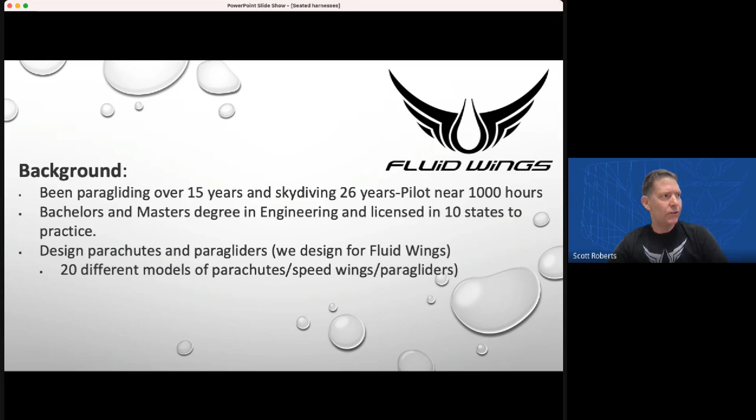All right, my background is I've been paragliding for about 15 years, skydiving for about 26. I'm a pilot with a bunch of hours. Got a bachelor's and master's in engineering. I practice in a bunch of different states. I still practice. We design the parachutes and paragliders, so I do the numerical stuff. I'm the numbers guy, and Kevin is the hands-on guy, where I'm like, hey, look, I got an idea. The numbers say this. What do you think? How do you think we roll it into reality? At this point, we've done over 20 different models between parachutes, speed wings, and paragliders. Some of them never got released, but we've done a lot.

We were jumping with seated harnesses back in 2009, both Kevin and I. We weren't doing it for skydiving, we had another project we were working on. So we developed one and started jumping it to do something else. That's kind of how we got our feet wet in this stuff. And next thing you know, we're building parachutes and paragliders.

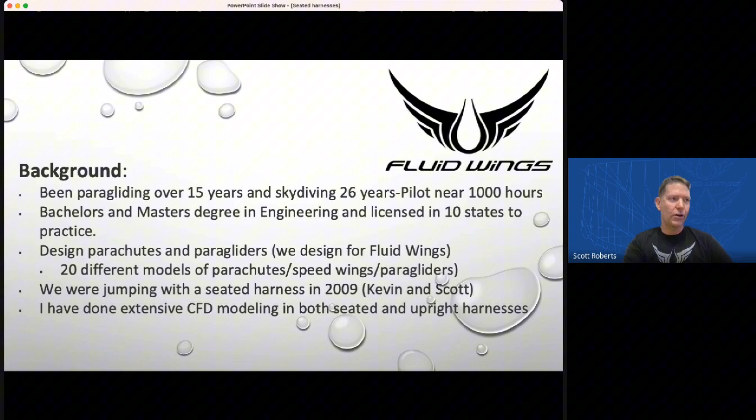I've done a ton of extensive CFD modeling, correlated CFD for seated and upright harnesses. So we do both, and we both fly high performance wings, foot launch, out of airplanes. We're flying this stuff daily. This isn't some guy sitting in an ivory tower. We don't do anything we're not asking you guys to do.

Let's talk about it. Everybody calls them supine harnesses, right? If you look up supine in a medical book, they usually talk about someone laying down. No one's laying down in these harnesses, not yet. There's some guys in paragliding that are getting close, but even then, they're still sitting up. They've got about a 45-degree angle on their back. So I always like to dig into the correctness of each thing, and to me it seems more like a seated or a recumbent harness. Supine seems like maybe not the right way to refer to it. So I always throw that in as the first thing to think about.

We're going to talk a lot about harnesses, and we're not going to get into the nitty-gritty of designing or testing skydiving harnesses. But I can tell you that what we're telling you today isn't just stuff we've designed and built that's been jumped, but we've also designed and built stuff that's for sale. In our paragliding world, we have a line of harnesses. So this is something we're pretty familiar with.

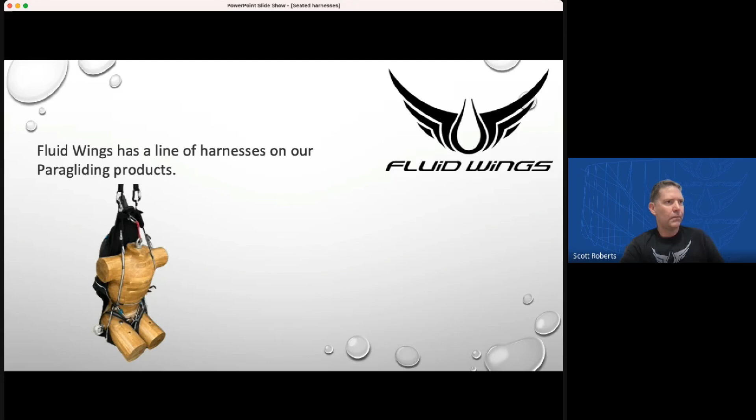You see the picture there, that's some of the testing. That's actually the reserve loop testing on a harness, our current paragliding harness. Some of the EN testing. EN is a European norms standard society for Europe, and they are basically like a TSO for paragliding equipment.

The certification is much like a TSO certification. In some ways I think it's a little more thorough. In other ways it's a little less robust. I say that because we'll talk a little bit about what it entails in a second.

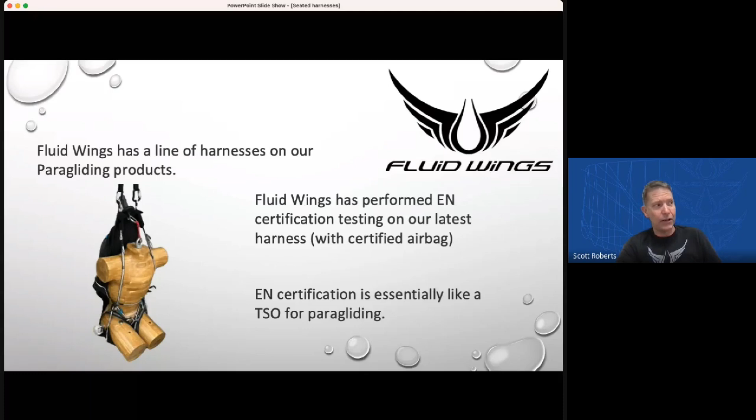So you saw the last load test, that's from the reserve loops. On the harness, this would have a reserve and then the main, and you have to test strength for both scenarios. So again, it's a little more thorough, right? It doesn't have to take a drop load at 254 pounds and 185 knots, but it has to take a load in a lot of different load cases.

So they're static tests, not dynamic tests typically. There's about 7 different load combos, all derived in the EN norms. EN 1651 is the document. Each static load is held for 5 to 10 seconds, and it's somewhere between 6 and 15 Gs.

And it would be Gs because you certify your harness for a set mass. For example, our harness was certified for 120 kilograms, I believe, Kev? Yes, so we initially ran it for 120 kilograms, and you derive the static loads by taking gravity and multiplying it times your mass. Mass times gravity is force, or mass times acceleration is force, and gravity is your acceleration. So you get your weight that way.

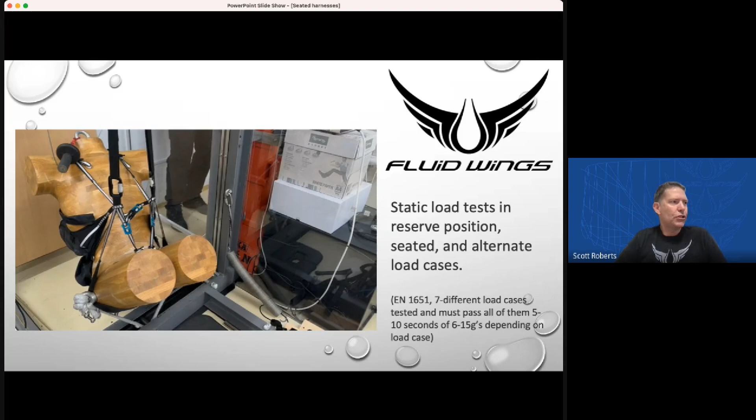So you end up testing 7 different load cases, and this is one of them being tested. The same specimen has to withstand all these load cases. So you see this one is our main hook-in point load test. You're not going to see a whole lot, but you'll start seeing it moving now, see that the webbing starts to give. You can have little local failures on fabric and stuff like that, but you don't get to have any failures on webbing. It has to remain structurally intact, the same piece, for all of these tests too.

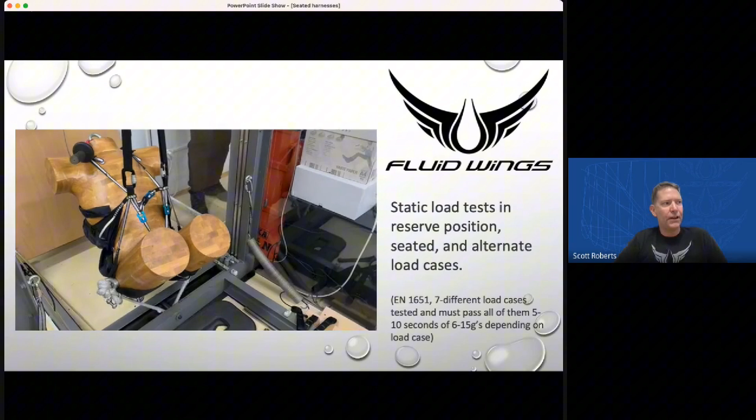So you have to pass all 7 tests, and they kind of build on each other. This is the second test, it's pretty easy. If you fail this one, you're kind of starting over. The reserve one was the first one we did, this is the second one, and then you go through them in an order. You go through all kinds of different stuff.

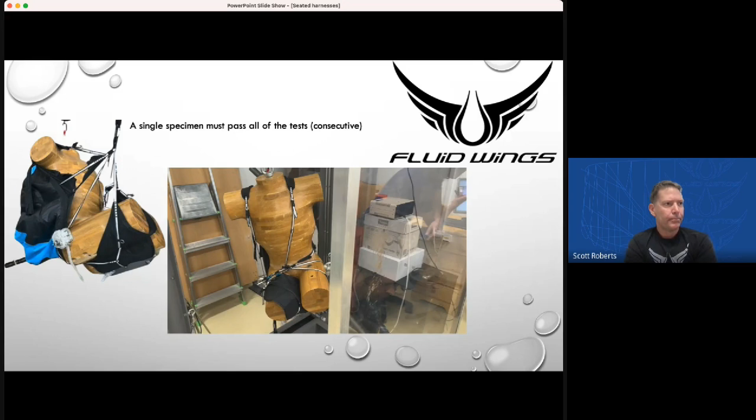That's a single harness, single riser connection, you still have to pass a load test with a single riser connection. Another one is you have to pass a load test with it pulling down, so like you're inverted and it's pulling. See right there, some of the fabric gave way there, but it held.

Single specimen has to pass all of that. So sorry about that.

That's a little more nuanced than just dropping it out of an airplane really fast and having to do it 3 times, right? I think the future holds something a little more in between for some of these tests.

I think there's a lot to be learned from the paragliding side of the house. We get a lot of really valuable knowledge paying attention to the paragliding world. It's hard to straddle both industries, but it's paid dividends. They're doing things in materials, engineering, and certifications that we're not doing in skydiving, and I really like what they're doing. I share this with you guys to demonstrate, hey, we're not in a vacuum, we know a little bit about harnesses, and also to say, look, this is what other industries are doing. As an industry we should watch that and maybe adopt some of it. It'd be really neat.

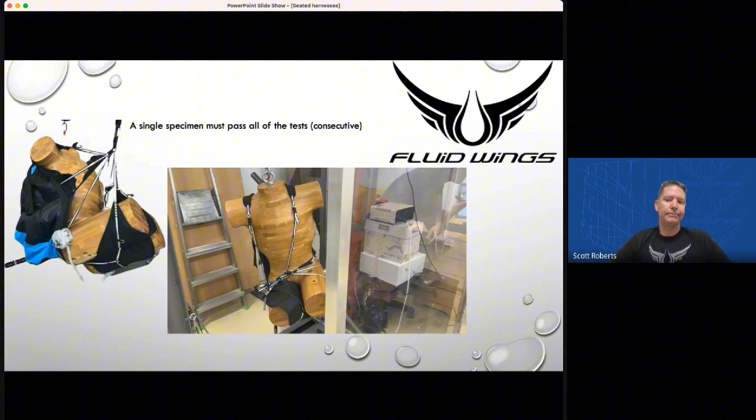So why do we like these harnesses? You know, they're fun, but for me, being the wing manufacturer, most of this is about aerodynamics, right?

We recognized that early on after flying these with some parachutes as part of our testing to bring them into our original project. Wow, parachutes fly a lot different. They start flying more like speed wings, and they're fast.

So we recognized early on that there was an aerodynamic advantage, and that we needed to quantify it at some point.

I wasn't competing, Kevin wasn't competing, but we know a guy who does, and he was for a while. He kind of wanted to know what the difference was, what he could do, and what it was going to be difference-wise for him. You could feel what was flying faster, but what position really was the fastest? What position made the most sense?

I wanted to truth this stuff with CFD so that I could model it properly, so I could say, hey, this actually makes sense, and here's where I can predict behaviors now.

The only real way to do that is to instrument the heck out of some parachutes, or spend some money and go to a wind tunnel.

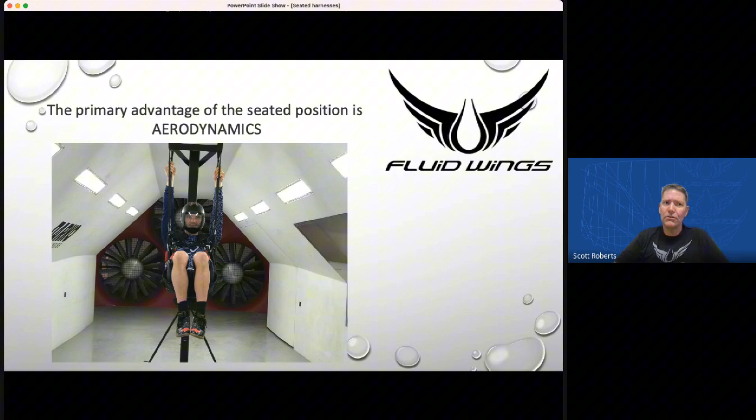So we went in, I think, Sven, was it 2018, 2019, when we went to the wind tunnel? Sometime around there. So it's me, Kevin, and Sven, and we all went up to a wind tunnel and spent a couple hours.

Besides testing them in flight and stuff like that, that's really the only other alternative - you can model them, or you take them to a wind tunnel.

That tunnel, incidentally, is no longer in existence. We were some of the last people to be able to get in there. But it's a tunnel that cyclists and downhill skiers use pretty routinely to figure out their best aerodynamics.

Any Olympic cyclist, actually any Cat A or Cat 1 cyclist, has probably been in a wind tunnel so they can figure out what their best body position is. Same thing with downhill skiers - they do that as well.

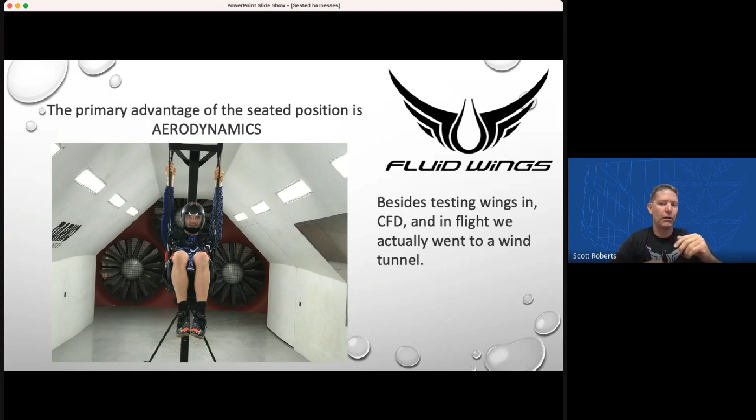So we kind of went there with an open mind. We thought we knew what we were going to be seeing, but we tried to test everything, and we took Sven and kind of put him through the ringer. We split up our time really.

And said, hey Sven, here you go, you get this amount of time, just play with it and see what you see.

The neat thing about this particular tunnel is they ran the speeds, but out in front of you was a drag force and other parameters projected on the floor, so you could sit there and see in real time what was changing.

It also logged it to an Excel spreadsheet that we kept, and we took a bunch of video as well. So it's neat - we were able to get a lot of different body positions and stuff like that. Sven was able to play with some of the nuances of what matters for him, because everybody has a slightly different body.

One of the things we learned talking to the gentleman that operated the wind tunnel is that he sees a lot of cyclists and skiers spend a lot of time figuring out little nuanced things that matter for them, maybe different from their teammates. So about half the time in there, Sven was spending with that, and about the other half we had a test card of body positions we wanted to look at. I really wanted to get drag numbers for certain body positions.

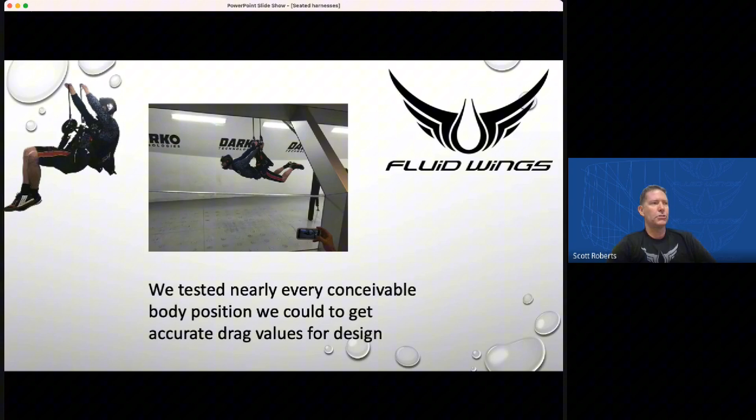So you can see there's a bunch of different stuff that we were doing. These are all taken from that exact spot, I just cleaned out some of the backgrounds.

To distill a lot of that down, I'm going to run through the basic body positions in order from lowest drag to highest drag. Number one was the best body position: seated, legs tucked up, arm width, arm position, elbows, legs together, legs crossed, stuff like that. That varied a little bit person to person, but it was pretty obvious that tucked up was the best body position, the least drag, best option.

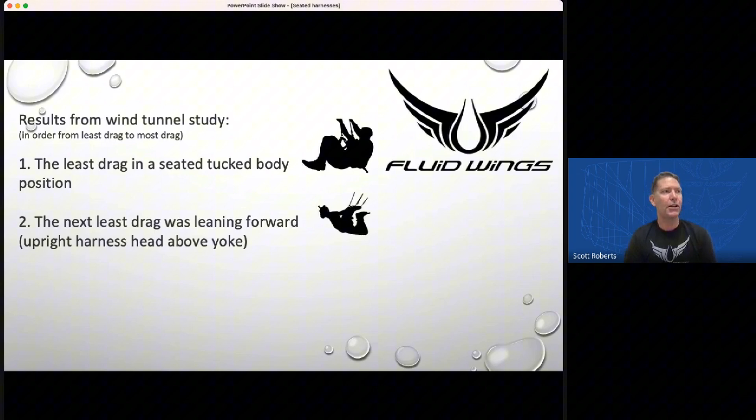A little bit surprising was that this was also a very good drag body position. I'll say leaning forward with the head above the yoke was a very good drag position. Caught me off guard, I didn't expect it to be so good. I knew it would be pretty good, but it was actually pretty low drag. Seemed to do pretty good.

Upright, seated with the legs pulled up, probably pulled up a little bit more than that, but that was kind of third place, and it wasn't super far behind number two. Number 1 and 2 were closer than I thought. 2 and 3 were pretty close.

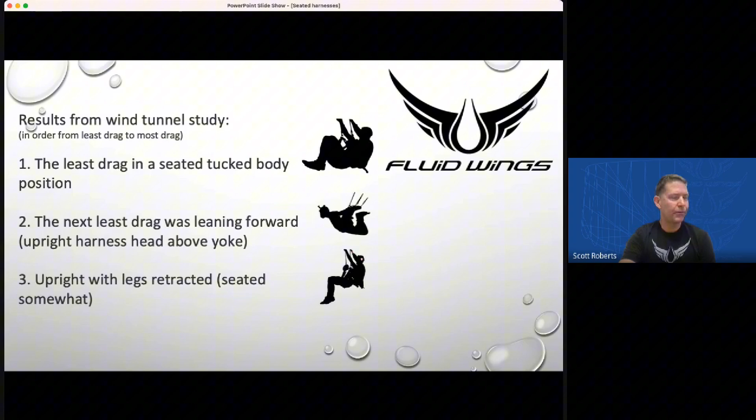Then we saw a really big jump on number 4. Number 4 is kind of the one that surprises a lot of people, but didn't surprise Kevin or I: leaning really far forward was kind of the worst case scenario. If you run the numbers, as soon as that head dropped below that yoke, leaning forward, drag started shooting up through the roof. So something that we've been saying for a while, that crazy lean has no purpose. I'll go through later and tell you the other part that it doesn't do, but aerodynamically, once your head goes below that yoke and exposes the back pad on a traditional harness, all the benefit goes out the window aerodynamically.

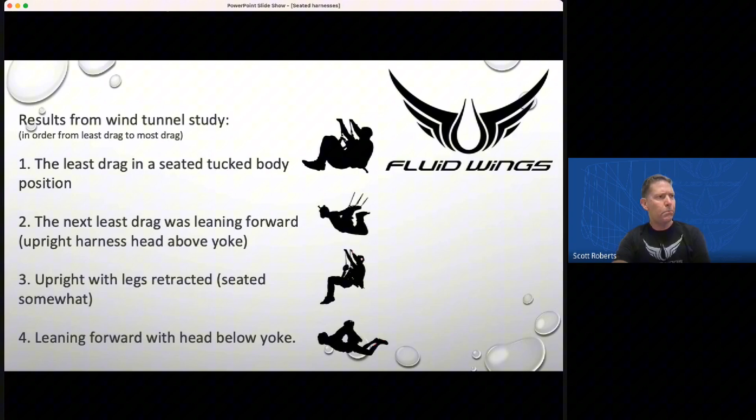So that's what the wind tunnel showed us. Pretty neat because we actually have numbers for it, so kind of lock that in. I just share this stuff so that people can incorporate this in their flying and maybe it helps them.

So let's talk about drag of pilot versus the parachute. In general, when you model this stuff and just do the total drag, because we measure once you know your lift and your airspeed—or you don't even have to know your airspeed—once you know your lift and your glide ratio, you can back calculate your drag. I talked about that in my last seminar, really powerful tool. So I already knew what the total drag for the system was. I had a pretty good idea what the parachute drag was because my model tells me, but my model isn't 100% accurate, it's a model.

CFD is really good for a lot of things, but at really high angles of attack and with flexible mediums, like with aeroelastic effects, which is what we get a lot of in parachutes, it starts becoming less useful. So I could deduce what my parachute drag was and my body drag was, but it was just a good guess. I had to measure one of them. That's why the wind tunnel was so useful for us, is we measured one. Now I know the body drag, so I know the total drag, and I can back calculate what the parachute drag is. You could try to do it the other way, but this was the best way to measure it. In general, the pilot drag is about 50% of your total drag budget for a system. So half the drag is coming from the person dangling beneath the parachute.

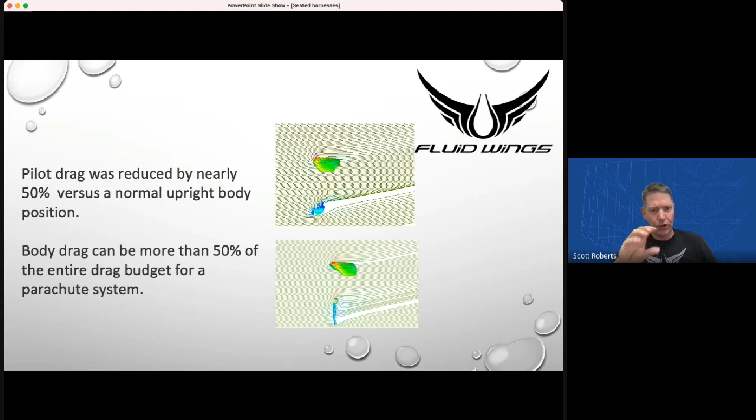So that body drag can be half of the entire drag budget of the parachute system. So the body drag is huge. Now, when we were able to go seated to vertical, our drag numbers for the pilot alone were about half what they were when you were standing up. So let's just say if you're vertical, you're creating 100 pounds force of drag. In our testing, sitting down was putting us somewhere in the range of 50 ballpark.

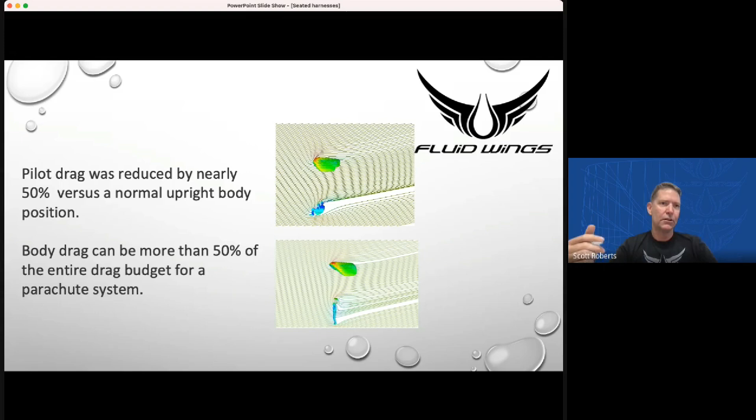That means, if your pilot drag is half seated and the pilot drag is 50% of the total drag budget, you can get a 25% reduction in your total drag just by going seated. So it's going to be a pretty good system. So we got the drag reduction. We've all been flying it. Everyone's like, oh, cool, we're going to go super fast. It's going to be super easy.

Wait, it's not easy. It actually brought in a ton of problems. And Sven spent 5 years, I've watched him, dealing with boost. And we tried everything we could, all kinds of different ideas to deal with boost. When I say boost, I mean coming down, you recover, and then you get an uncontrolled climb. That is a direct effect of reduced drag, guys.

That reduced drag is giving us a lot higher speeds. We're reaching top speeds that blow vertical harnesses out of the water now. The numbers I hear from these guys are mind-boggling. Put your mind in a bottle.

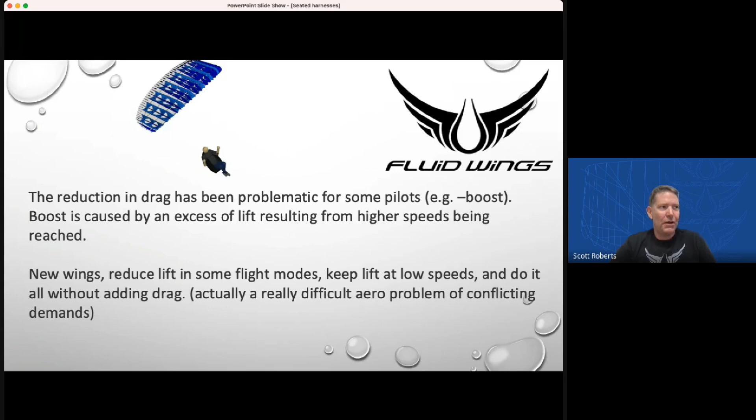So we had to design a whole new group of wings. We want to reduce lift in some flight modes. We've got to keep lift at low speed because you can't just slam into the ground. And you've got to do all that without adding a bunch of drag at any point. Because if you just want to make it steeper and reduce lift, you add drag, the drag overcomes the additional speed you get and you won't climb. That's a dirty way to do it, but it's not elegant, and it's not going to give you an overall boost in performance. It may increase your top speed.

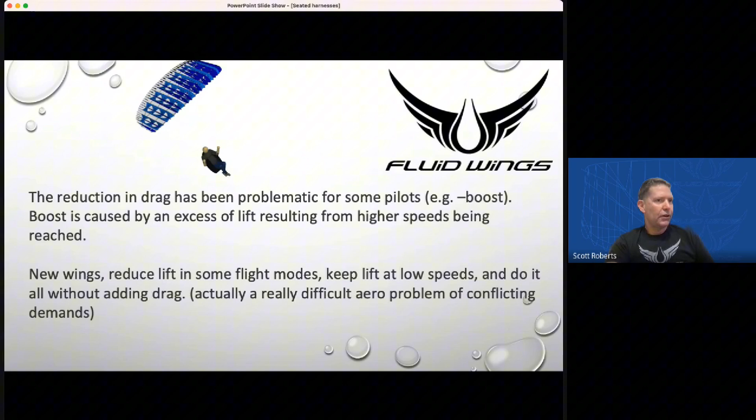So solving all these problems simultaneously, they're conflicting demands. It gets really tricky, and it's not completely solved, but that's a lot of the science behind the HK3 and where we're able to make some cool strides. We were able to really reduce lift without adding a ton of drag, and then keep it on the bottom end when we needed it. So it took a while to figure out, but that's the magic of it. Every time you encounter something new like that, you have to come up with new creative solutions.

So let's talk about boost a little bit. What causes it? Think about that for a second. There's going to be some times here in a few minutes I'm going to ask you guys to jump in, so I'll tell you when to take the mute off and hop in. But let's just talk about it right now. We're going to make everything simple. Let's assume that everything stays the same on the wing: your angle of attack, your coefficient of lift, your density, and the area of the wing.

You're just cruising along at 85 miles an hour, and you're creating 200 pounds of lift. Well, what happens if I go a little bit faster? Let's say I'm going 100. You just added about 80 pounds of lift. Well, if you only weigh 200 pounds and you're producing 276 pounds of lift, what happens? You go up.

Go a little bit faster than that. And notice it's a squared function, guys. V squared. Look at that V squared up here in this equation. Another 20 miles an hour faster, you're now creating 400 pounds of force. You're going to really boost. So it's exponential. That's the beauty of the lift equation. So that's why boost is so uncontrollable.

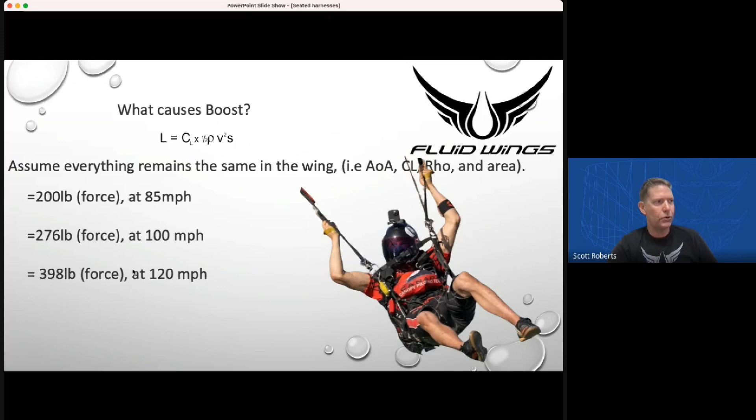Anytime you have a force greater than your weight, you're not in balance. You're going to create an acceleration upwards. You're going to climb. So, important piece of information there: I didn't say anything about drag here, guys.

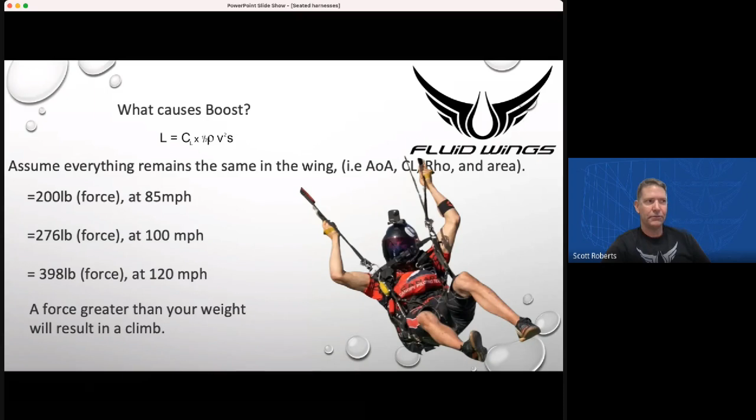So when we're flying these aircraft, we're gliders. We don't have an engine. But gravity is really our engine. But I want to kind of think about this and give you guys a framework to think about this in terms of airplanes. There's two types of airplanes I'd like you to think about. First would be a sailplane. And if you want to get a sailplane to go faster and perform better, what do you do? Well, I'll answer that really quick. You go ahead and clean it up aerodynamically.

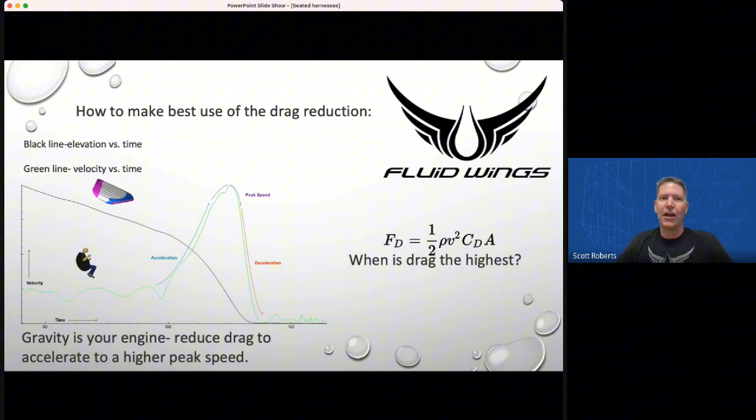Kev, you can answer this. What do we do? We want to increase performance on most airplanes. Put a bigger engine on it, more power. What are we more like on a parachute? Are we more like a sailplane? Or are we more like an air racer? Your average skydiving parachute has more aerodynamically in common with an air racing machine. So the best way that we can add performance to our wings is to get a bigger engine. So when you're framing on how to take advantage of this drag reduction, think of it in those terms. Like, how can I use this to maximize my engine?

Thinking back to when I was competing, Jay Moledzki would show up at a swoop meet, and it was a different game. When Jay showed up, the game was a completely different game. You had to get different scores to win. It was just different. And the big difference between Jay and all the other competitors back in the day wasn't that he had better technique in the course, or that he leaned more forward when he was climbing out to go distance, or that he got better water drags. It's that he showed up to the meet with a bigger engine.

And it was obvious from the second he snapped onto final that he was coming with a higher airspeed and more power than anybody else. And that was the big difference. There's a lot of other nuances that he was really, really good at. But the biggest difference that you could see from a competitor was the biggest engine. And there's other guys doing the same thing. Sven shows up with a really big engine. So does Kurt. There's quite a few other guys. They're showing up bringing a ton of heat when they snap onto final. I'd argue if you're going to do one thing to help your swooping and to get better swoops, it's going to be bring a bigger engine.

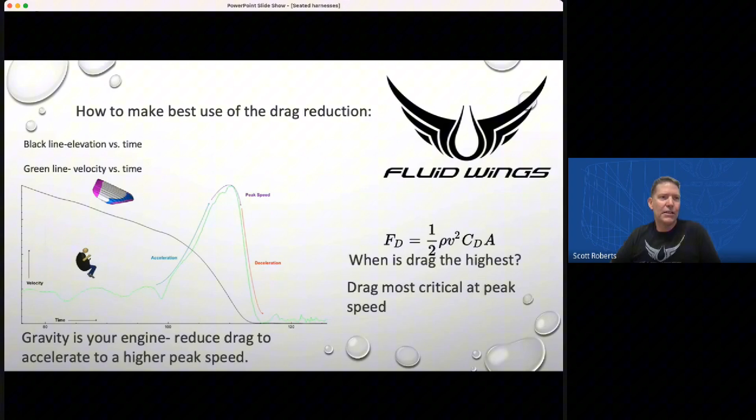On that note, I think that anything other than being a small ball in the harness is probably not a smart use of your drag budget in this range. So sitting up, grabbing your fronts, making a big gingerbread man pose, maybe not the best move. At least that's not what the science tells me. It's not what the aerodynamics tell me.

So I want to kind of key this into some things I hear people talk about. I want to do a thought experiment with everyone. Let's just say you're cruising along, you've planed out, you're in level flight, right? And we developed a superpower, that I'm allowed to instantly reduce your drag to nothing. I can wipe it out and give you zero drag. That's my superpower. That would be a really good superpower. I wish I had that. What's going to happen?

I'm not going to give anybody the answer, but you guys can all pop in and tell me what you think. Let's talk about it. To sum it up again, you guys have just laid down your swoop, you just recovered, and you're motoring across the grass, and your drag went away. What can you expect to change, if anything? I wouldn't think anything. Nothing. Your speed will stay the same, if not increase. Boost all the way up to exit altitude.

I would say boost as well. Depends on where your drag is, like between the canopy and the body. Okay. Well, if there's no drag, period, then the only force acting on you at that point would be gravity, right? So for sure you would initially extend out the acceleration phase. Actually, you would technically accelerate for as long as possible because there's no terminal velocity for the canopy or the pilot, right?

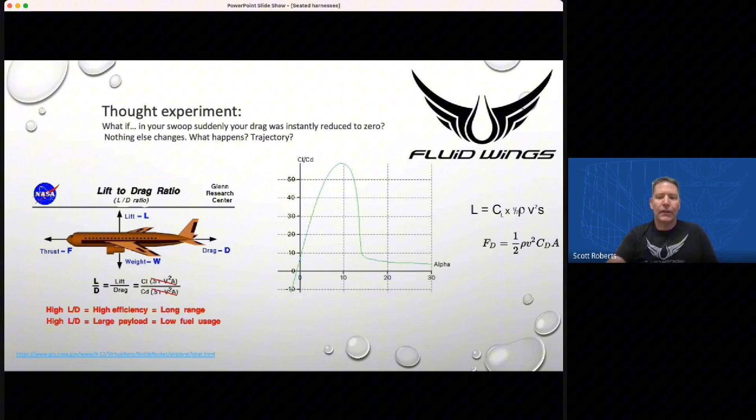So let's look at this. There's your lift equation and drag equation and glide ratio equation. So let's look at glide ratio, because basically I asked what's your trajectory going to be? That's the same way of asking what's your glide ratio going to be? So what happens when you divide by 0?

Infinity. So what's an infinite glide ratio look like, guys? It's flat. It's horizontal. That's an infinite glide ratio. So the answer to this question is you'll continue along your level path forever.

You won't climb. You won't descend, because you're going to maintain lift equal to your weight, and there's no drag, so you won't decelerate. You won't accelerate because you've passed that acceleration part of your curve. You can only decelerate after your peak speed, guys. So once you've leveled out, you've already established equilibrium. So if I take your drag away, you just continue on.

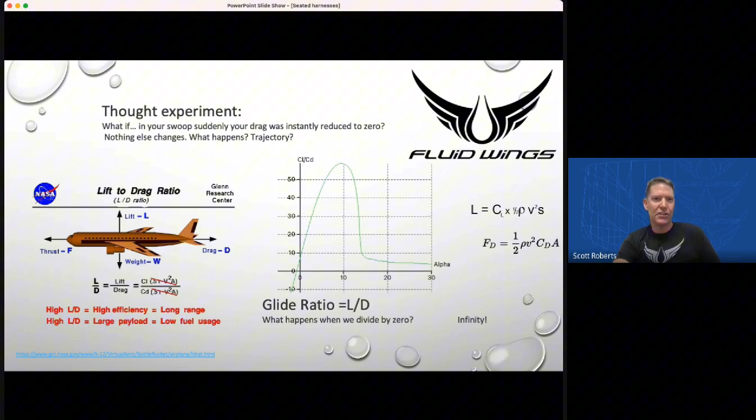So this is a really powerful thing to think about as we reason our way through how to fly these wings. So I hear people say stuff like, okay, well, I got small and it caused me to boost as I came through my recovery arc. Well, no. Getting small didn't cause you to boost because it just changed your rate of deceleration. You can't accelerate once you're already in your recovery arc. The system as a whole has to continue to decelerate.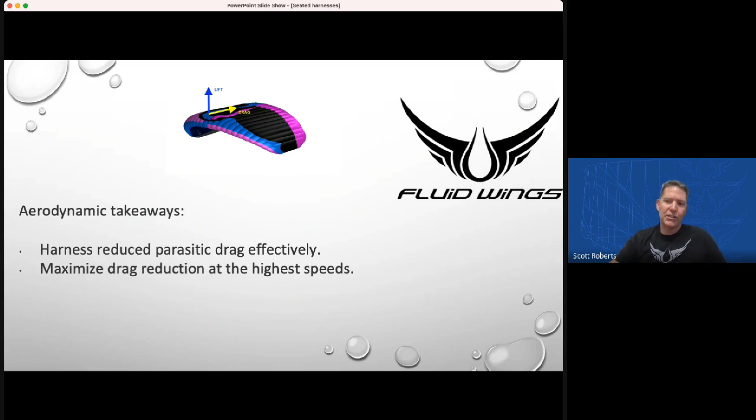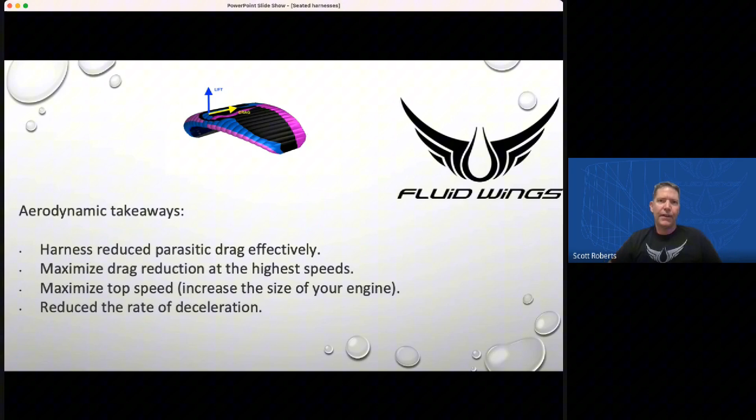So the aerodynamic takeaways are that the harness reduces the parasitic drag really effectively. It makes a lot of sense. You maximize that drag reduction at your highest speeds and during acceleration. You want to maximize that top speed to give you more power. That increases the size of your engine, and use that drag to maximize the top speed. You can reduce the rate of deceleration by staying aerodynamic in that phase, but you won't ever actually accelerate in that phase.

So let's kind of look at the forces on these wings. And this kind of ties into what we were just talking about, but we really only have a few. In flight, it's lift, drag, and weight. There were some questions last time and some comments afterwards on the aerodynamics seminar. I want to define our local axis in a way that makes our math super simple.

So we all know that the actual force on that parachute is up and back, correct? Because you don't really break it down in the real world. Drag happens spread out over a whole wing, and it kind of acts as one net force, and it would be up and back. But for math purposes, we can treat force vectors like triangles. So adding up the vertical component of the lift and the horizontal component of drag, they combine and add up like a triangle, and you do your vector math, and you can break them down into different components.

So when I say lift here, I'm talking about the vertical component of it. When I say drag, I'm talking about the horizontal component of the lift and the drag on the object, the whole system as a whole, because we're going to integrate it because we're a whole aircraft. That's about where drag would act, by the way, guys, somewhere between there and halfway up. So it depends on the ratio of the drag of the pilot. If it were exactly even, it'd be mid-span. If you reduce the drag on the pilot, that drag location moves up. And then weight. And weight doesn't change unless you're adding ballast or dropping it.

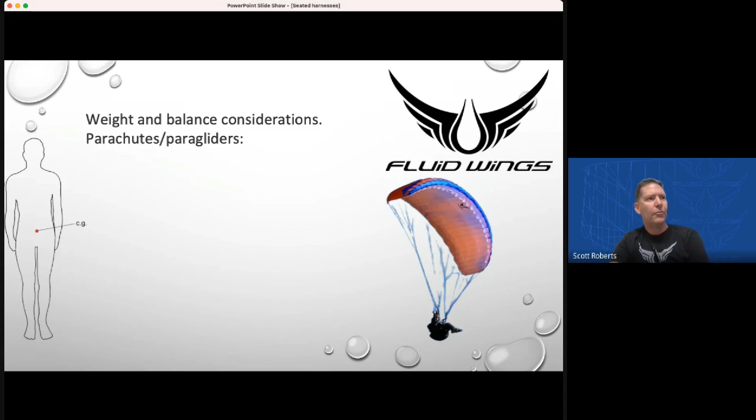Before I go into the next thing, let's talk a little bit about CG on people. Just before I say that, let's note that none of us do weight and balance on our parachutes before we fly. But on your average person, your center of gravity is somewhere between 50 to 55% of your height. It depends whether you're a girl, whether you have big thighs, you're a chicken-legged gym rat that has a big upper body, or just how you're built, right? It's going to vary quite a bit person to person. So 50 to 55%, it's usually somewhere in that pelvic area.

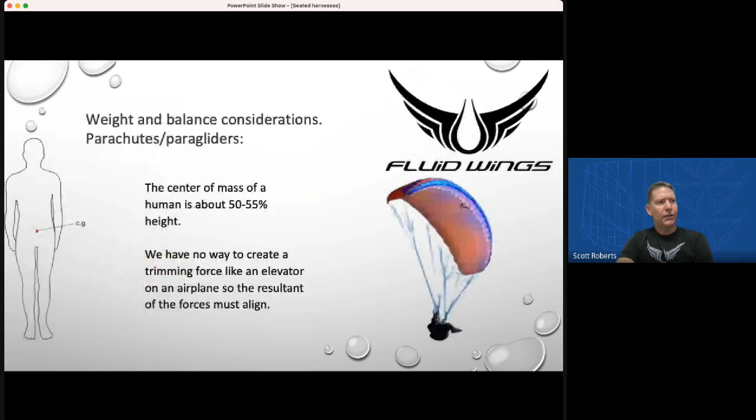And on our wings, we actually don't have a way to create a trimming force. The pendulum is kind of what we depend on, as we're underneath that wing. So we've got a little bit of offset that way. But horizontally, we don't have a lot of distance. So if you look here, I'm going to go back real quick. Essentially, because we don't have that trimming force, your center of gravity would have to be somewhere right underneath your center of lift.

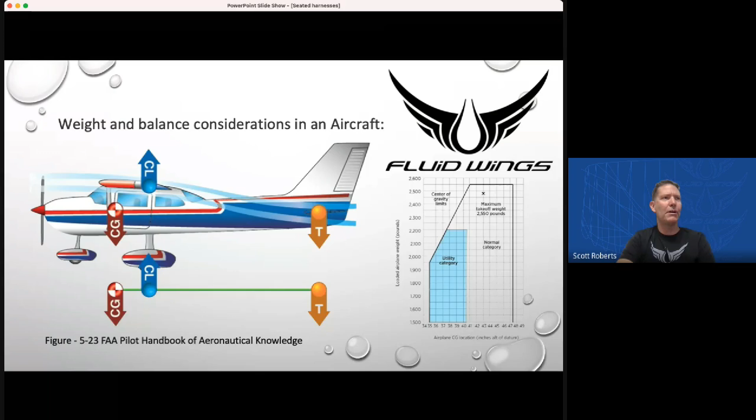So that's kind of where we're at. It's a useful tool and good enough for what we're talking about now to just say the two align. And for all practical intents and purposes, they do. There are some special cases where they don't. I can talk about that in the questions later, but follow me that they generally align, right?

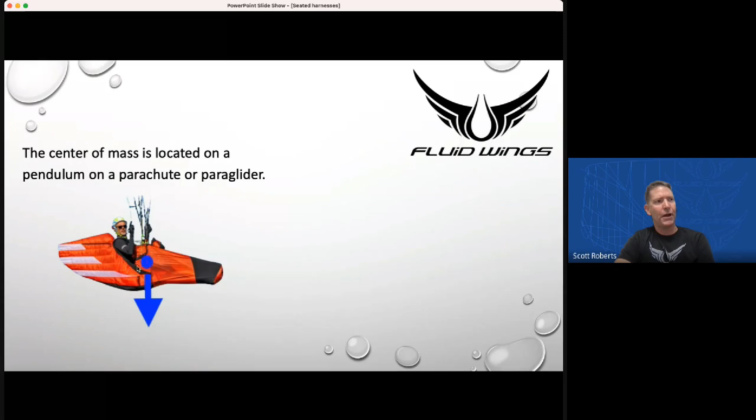I can tell you for sure that your center of gravity aligns with the V in your risers when you're below your risers. And again, if you look at these photos, here's a paraglider in a pod harness. His pelvis is probably right about here, and it's located directly beneath the hang point on his risers. So you basically have to have your center of mass aligned with the riser load path. And the riser load path is essentially aligned with the lift location on the wing. Otherwise, you'd have to do a weight and balance on every flight.

Think about this for a second, because I hear people talk about CG a lot in harnesses. And that's what I'm getting at, that's what we're trying to talk about here. I just wanted to jump in so everybody's following along with this. What Scott is saying is that when you jump out of a parachute or fly a paraglider, you don't have to do a weight and balance.

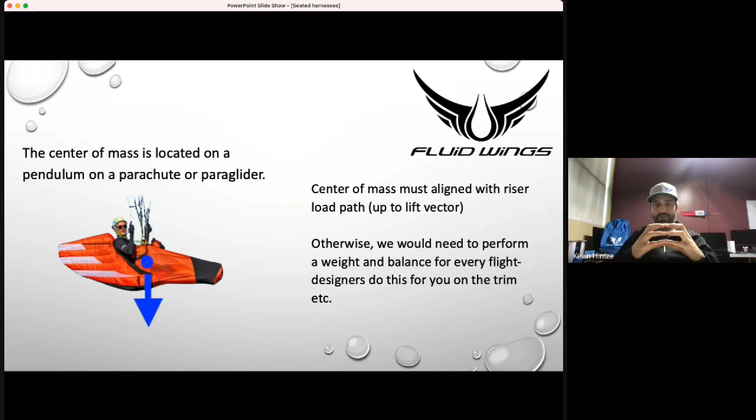And the weight and balance isn't just how much weight there is, right? It's whether you're moving it forward or aft of that center of lift, because then it becomes unstable and unrecoverable. We don't have to do that on a parachute. This is critical for what Scott's about to move forward with. Well, we don't do it for us because Kevin and I do it for you. There you go - that's one of the biggest problems in design we have to solve, right?

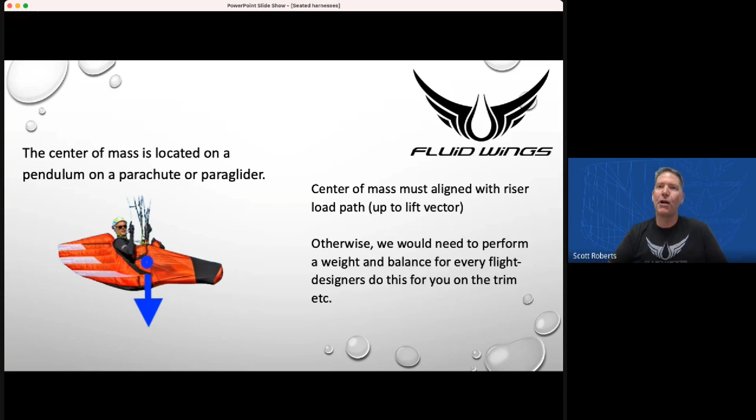That CG is set in the design. It is, yeah, and it has to align with the lift and the risers. Here's why: because you're using textiles. If we had carbon fiber lines that I could put compression on, maybe I could change these things. But because we're using tension-only textiles and tension-only materials, you can only pull. And when you pull on two points like that, like on the risers, the CG has to line up underneath them, underneath that hinge point at the rings.

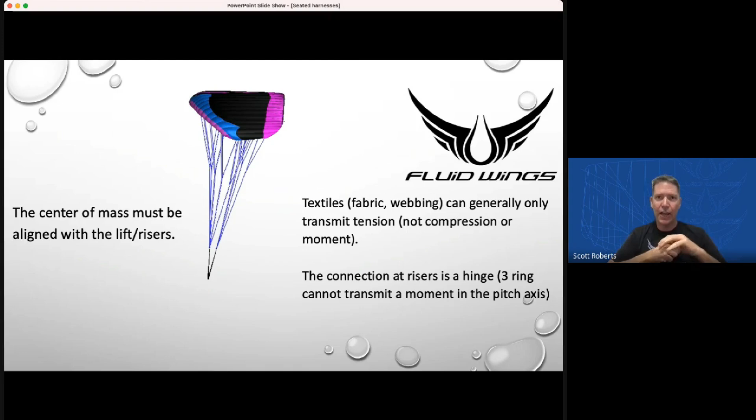Again, it's a hinge point. The three-ring axis - if I bend below the three-ring axis, I can't bend the top of my riser. I can't transmit that twisting force to the top of my riser. So it is a hinge connection for all purposes at your risers to your harness.

Does that look like it would work to you guys? Got my CG there and my riser there. It wouldn't work. And that's why we don't see, when people lean forward, we don't see that. If you could actually change your center of gravity and move it around underneath the wing, you could do something like this - you'd actually see something like that.

And if you notice, center of gravity - there is a center of gravity on the person, I think that's Sven - and you go up right there, there is the harness connection point, the risers. If you watch swooping, you'll see they align. They have to.

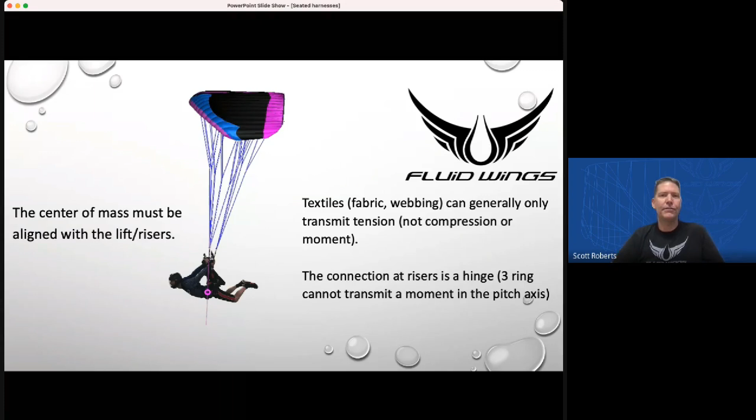So we can't move our center of gravity forward or back. But what we can do is move it up or down. And therein lies the secret to a lot of the fun in these harnesses - you've taken that center of gravity and moved it up, basically setting it closer to the connection to the risers.

The other neat thing about moving it close like that is we've also freed it so that you can move it side to side more. So you can shift your center of gravity side to side. That's the extra harness responsiveness and extra harness sensitivity that you're feeling, because you can now take the center of gravity and move it to the left or right of your risers, in some cases maybe outside of that riser connection point. That distance between the up-and-down and the side-to-side is what you're feeling for the responsiveness.

But I hear it a lot - I hear a lot of people talk about being able to move their center of gravity underneath the wing, front and back. You just can't. You could take it in a hanging harness and test it, and Kevin's got some really good ways of illustrating that in a hanging harness.

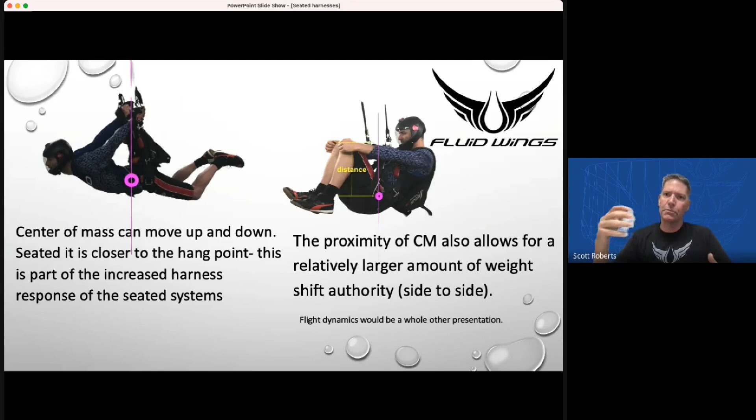And that's a lot of where people's misinterpretation comes from—what they're experiencing versus what the whole parachute is experiencing. Because remember, you may feel like you're accelerating underneath a wing because locally you might be, the pilot might be, but the whole system may not be. And therein lies the danger of taking what you're locally experiencing at the end of a rope on the lines and correlating that to what the whole wing is experiencing.

So hop in, Kev. It can also just be a relative experiential thing. What I mean by that is when you start the recovery arc in your swoop, you're diving and then you start leveling off, decelerating at a certain rate, especially if it's a nice continuous arc, not a real abrupt one. You have a nice linear deceleration taking place relatively. And if all of a sudden you're decelerating at a certain pace and then you streamline yourself a little more, so you have less drag, that means the rate you're decelerating changes. You're still decelerating, but your rate changes.

And that can feel like you've just accelerated, because you've gone from a faster deceleration to a slower deceleration. It's the same reason why paraglider pilots use a vario, a little instrument that beeps and tells them they're going up or down. If you're in strong sink, say 1,000 feet per minute down, and then you go to light sink, say 200 feet per minute down, you're still descending. But that feels like a positive sensation, like you're all of a sudden ascending, right? But you're still descending.

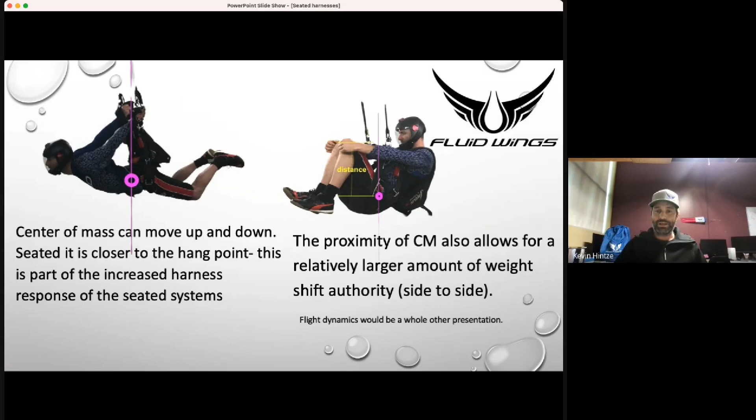It's the same thing in the recovery. If you're swooping and you've got lots of drag, you're decelerating at a certain rate. Then at that point you decide to lean forward, so now you've reduced your drag a little bit. Sure, you might swing through a little bit, but that's tiny, it's a tiny bit of the picture. What's happening is you're no longer decelerating as fast, and that sensation can feel as if you're accelerating. That does not happen. You don't accelerate.

So bottom line is, we fly these things because it's way more fun, right? Talk about hitting a home run, the paragliders figured out how to fly a wing. I think a lot of it's because they spend so much more time flying these things. We may spend 2 to 5 minutes on an average flight, where a paraglider can spend... what's the longest flight you've had, Kev? 6.5 hours. See? So they spend a lot more time doing it, and sometimes they've picked up on a few things that we haven't.

I love it. First time I did it, flying speed wings and paragliders, I was like, oh my gosh, why aren't we all doing this? I'm super stoked to see these things making their way out into the world. I'm super stoked to be designing wings to fly with these, because it's a whole different game and it's fun and it's neat, and it's just awesome.

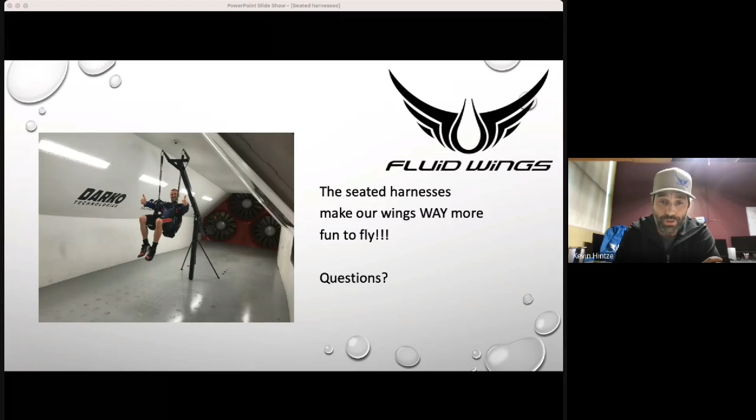And you know, one company in the paragliding industry thought we'll just make a riser so people can put them on all of their wings, and some people put them on normal paragliders, and they found that it doesn't actually equate to the same result. Like you said, stability as far as stalling, more prone to deflation. Those kinds of things are part of the equation, and so that all has to be designed and tested. So the profile is part of the process, designing a profile for this system, but also doing the testing to ensure that the ratios are correct so that it can be stable.

And yeah, if you do just try to put it on your own stuff, just know that you're going into test pilot territory, and test pilot territory sounds exciting and it sounds fun, but it's honestly terrifying at times. It can be.

Fair. Thank you for the very good answers. I was just trying to provoke just a little bit. Yeah, no, it's good. I mean, we're excited about this stuff. We love talking about it, and I just like to dig into more about the why. And that's all. So it's perfect. That was exactly what I was hoping for.

Thank you, guys. Yeah, fun stuff's coming, guys. We got some pretty crazy ideas. We always have, and some of the crazy ideas we had 10 years ago, we're finally starting to move that direction, and we've got to the point where we feel comfortable starting to do some of these things.

So, Sam, I'm reading your question about shorter risers, and I guess I'm not understanding it. If you could hop on and explain your question to us a little bit more, that is something that would be worth talking about. So, yeah, cheers.

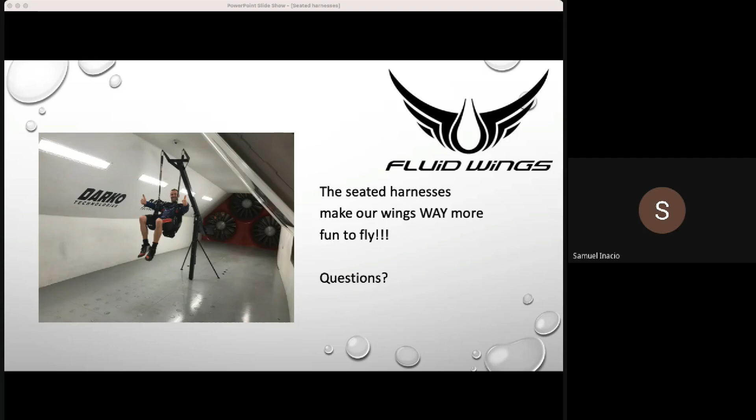I want to talk a little bit about that idea. I hear a lot of people have inquired with us asking, is the wing going to be deformed if you don't use a certain set of risers, or if they're not connected at the same spot and they V bigger? Is it going to be deformed in regular flight? No, you're not going to create a deformation. And I can prove that to you.

So you change the line tension a little bit when you do that, but you don't change the actual wing. So the idea that being on longer risers, if it changes the angles from say like that to that, is going to put a pinch in the wing usually isn't true. At least what we can change on the risers wouldn't be enough.

Now you may see some small changes in how the rear risers engage and stuff like that, because you do have a built-in cascade back there that's a triangle, and if you pull the triangle forward, it's gonna activate one line sooner. If you pull it back, it's gonna activate a different line. So you might feel rear riser performance change a little bit. We do notice that, and that is one of the considerations that we make when we're trimming a wing. So we actually have to get that feel right.

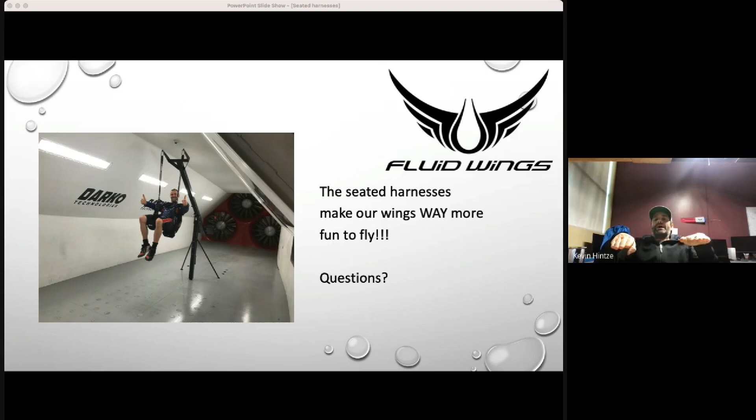So in paragliding, if any of you are getting into paragliding or speed flying, and you go buy a harness that's too small for you, there are also some other stability quirks that happen with the yoke coming over the shoulder and that angle to the carabiner. The higher that angle is, the more stability you have, where you can weight shift easily, but you're not likely to get flipped inverted and be stuck that way in a high G scenario. And so if you're wearing a harness that's too small for you, you could potentially bend over backwards in a high G scenario and get pinned to where you can't bring yourself upright.

So for those of you that are in speed flying, paragliding, whatever else, it's really important that you are flying, one, a well-designed harness, but two, it's properly fitted. You're not wearing something too small. Exactly. So if you're getting that gear, get with somebody who sells these things, spend some time in a hanging harness and get fitted, because it does matter.

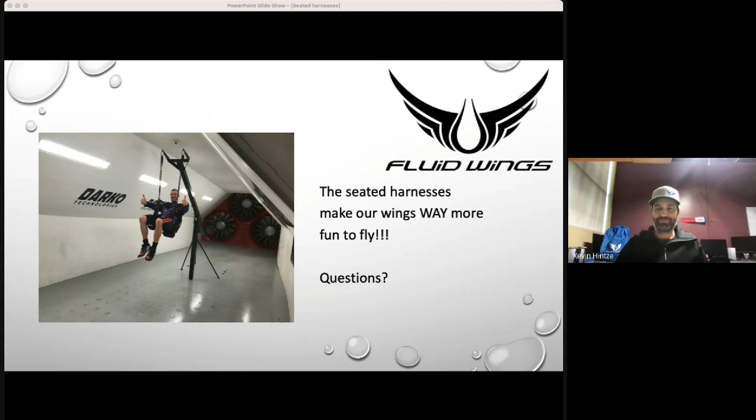Good deal. Is there anything else, folks? Because we love to hear ourselves talk. Well, good deal. We're at about an hour and a half, and I think the questions have dried up here. So it's probably a good time for everyone to go enjoy a frosty cold beverage if that's in your time zone. And if not, go back to work. I'm going to go back to work.